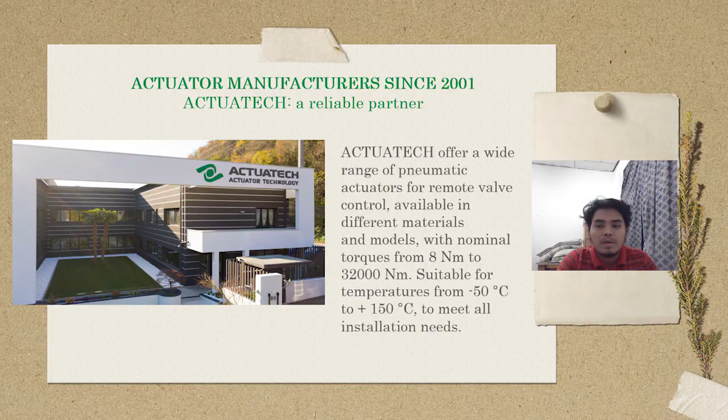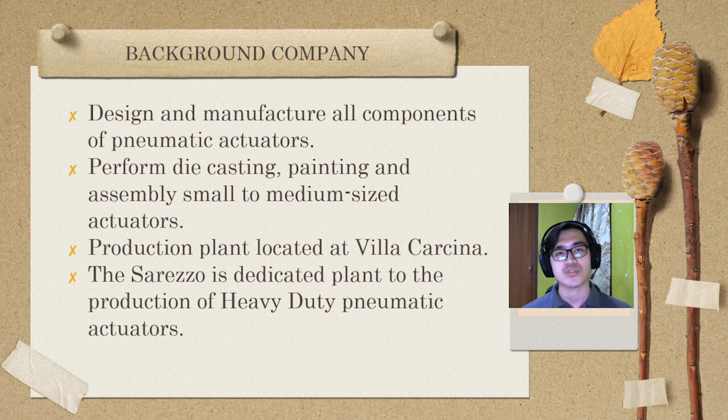Actuatech designs and manufactures all the components of our pneumatic actuators internally. There are two production plants. First is Villa Carcina, which carries out die casting, painting and assembly of small and medium sized actuators, while the other, the Sarezzo plant, is dedicated to the production of large pneumatic actuators, such as heavy duty actuators.

Meanwhile, the company also has its own vision, which is the right balance between man and the environment, improving quality of life and ensuring a better world for future generations.

Actuatech has its own mission, which is to provide a better world for the children and protect the environment that surrounds us, while concretely improving quality of life by making plants more secure and reliable.

During 2017, Actuatech built up a new headquarters and production site. They relocated the headquarters and production to Via San Lorenzo 70 at Villa Carcina, Brescia.

Next is for year 2020, new web identity was created. Actuatech overhauled its online image, which integrates institutional content with a complete product catalog, accessible also from mobile devices.

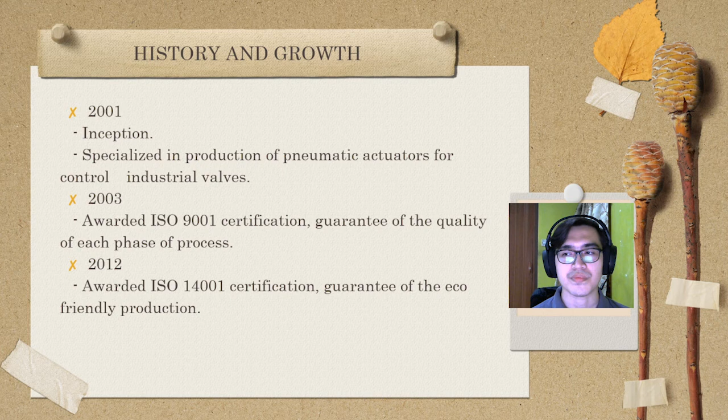Our company, Actuatech, mainly focuses on pneumatic actuators. The function of a pneumatic actuator is to enable forces produced from small pressure changes. Other than that, the power source also does not need to be stored in reserve for operation.

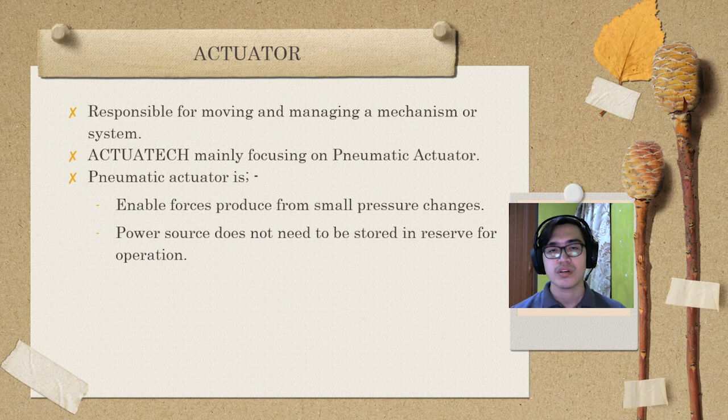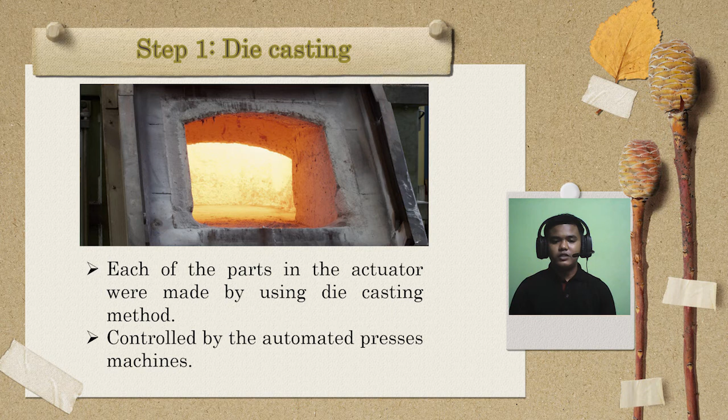Manufacturing process and technology employed. Step 1, die casting. Each of the parts in the actuator that were made from metal were made using the die casting method. This method was controlled by automated press machines.

Step 2, coating. Details of the actuator that require painting were controlled by a powder coating system. This system follows the regulatory standard accepted by the factory.

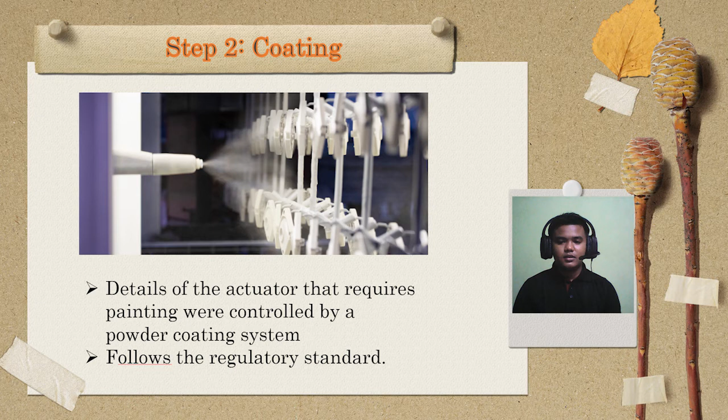Step 3, body machining. The internal machining of the body was done to minimize friction between parts and increase its accuracy and efficiency.

Step 4, piston machining. Automated control machining machines, controlled by experts, were used to machine the piston. This is to make sure it follows the standard needed for the actuator.

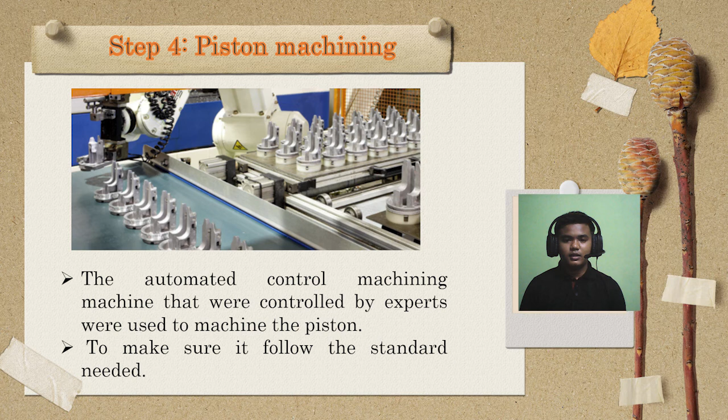Step 5, stem machining. The machining process of the actuator shaft was also controlled by a CNC milling machine, which is reliable for its accuracy. Step 6, molding plastic parts.

The plastic parts, such as O-rings in the actuator, were produced using injection molding machines. It undergoes strict inspection to ensure precision in the parts.

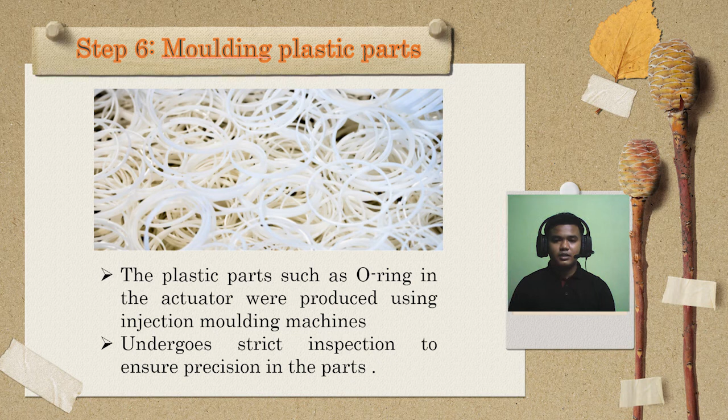Step 7, 3D measurement. To check the production quality, contact and optical machines were used to perform precise measurement on all the parts. This is to make sure that the parts can be assembled perfectly.

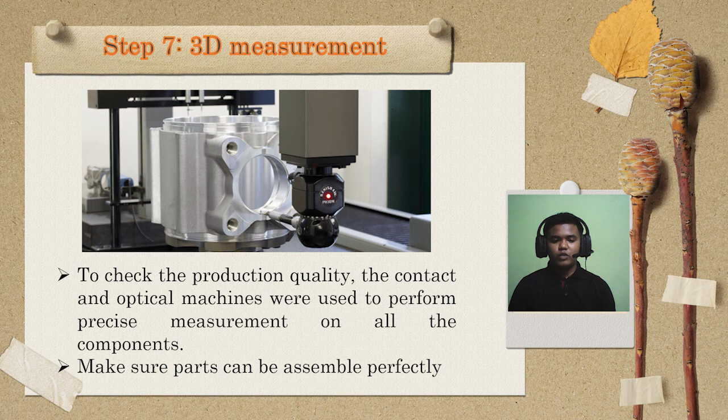Step 8, assembly process. Actuatech technicians follow the product at every step of the assembly process. This is to guarantee the reliability of the actuator produced.

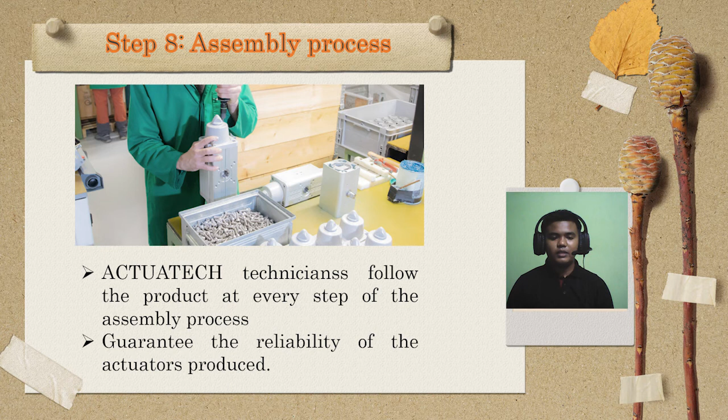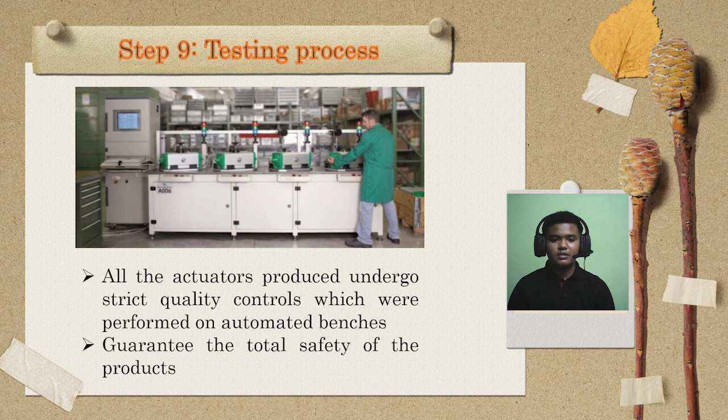Step 9, testing process. All the actuators produced undergo a very strict quality control which is performed on automated benches. This is done to guarantee the total safety of the products.

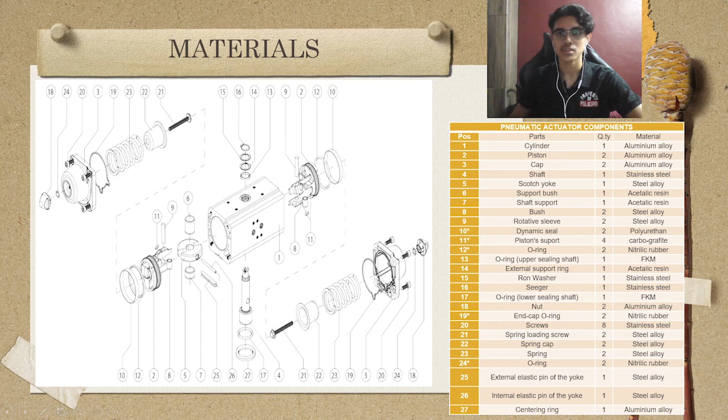For this slide, I'm going to talk about material and component in pneumatic actuator. There are 27 components in pneumatic actuator, and majority of the components are made of aluminum alloy, stainless steel and steel alloy. This diagram shows the exploded view of components in pneumatic actuator, and next to it is the bill of material.

For the second slide, I'm going to explain how does the pneumatic actuator work. Pneumatic actuator relies on some form of pressurized gas, most often compressed air, entering a chamber where the gas builds up pressure. When it has built up enough pressure in contrast to the outside atmospheric pressure, it results in a controlled kinetic movement of a device such as a piston or gear.

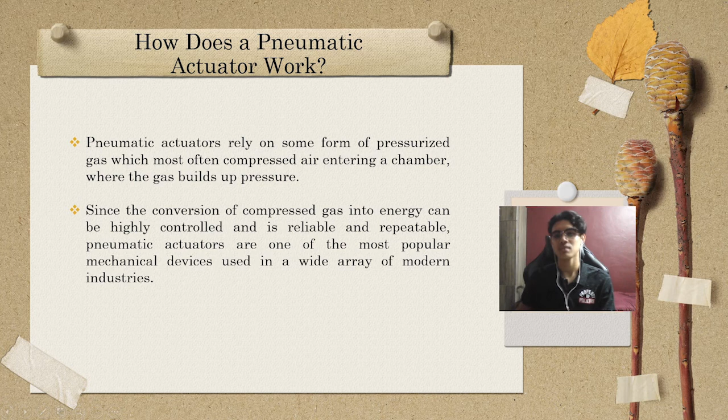This resulting movement can be directed in either a straight line or a circular motion. Since the conversion of compressed gas into energy can be highly controlled and is reliable and repeatable, pneumatic actuators are one of the most popular mechanical devices used in a wide array of modern industries.

Next, I want to talk about quality assurance. For Actuatech, guaranteeing quality to its customer does not just mean designing and manufacturing high performance and safe pneumatic actuators. It also means achieving this result through effective and efficient internal processes. The quality of Actuatech products and processes is demonstrated by specific certification.

The creation of a quality product implies the rigorous control of each product phase, from design to testing. The Actuatech design department, using sophisticated 3D CAD software, designs independently all the components of every single actuator that will be produced in the company factories.

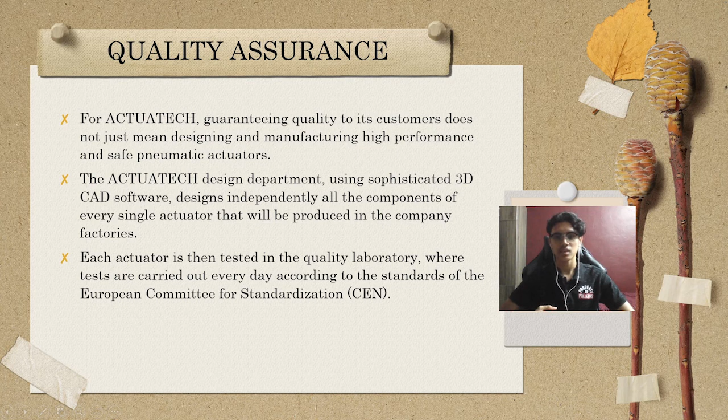Each actuator is then tested in the quality laboratory, where tests are carried out every day according to the standards of the European Committee for Standardization (CEN). This is how Actuatech successfully produces pneumatic actuators capable of guaranteeing high performance and reliability. They can be used safely in many fields, from environments with potentially explosive atmosphere to the maritime sectors.

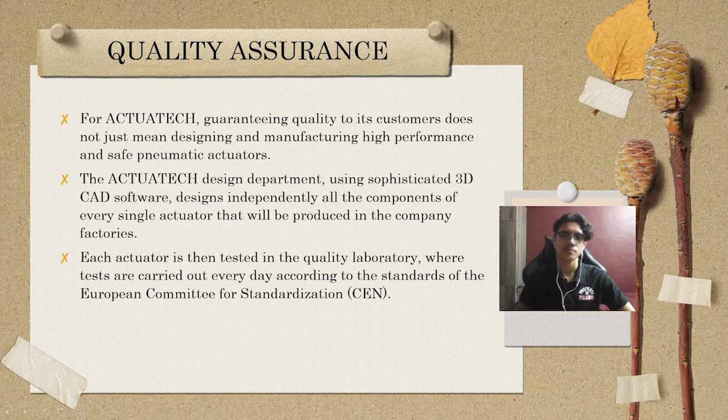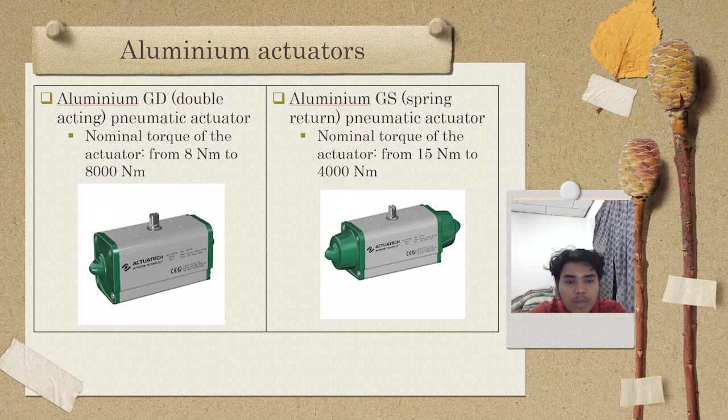There are 7 categories of products produced by company Actuatech. First category, aluminium actuator: aluminium GD double acting pneumatic actuator. Second, aluminium GS spring return pneumatic actuator. Next category, actuator with integrated handwheel: GDV double acting pneumatic actuator with integrated manual control. Second, GSV spring return pneumatic actuator with integrated manual control.

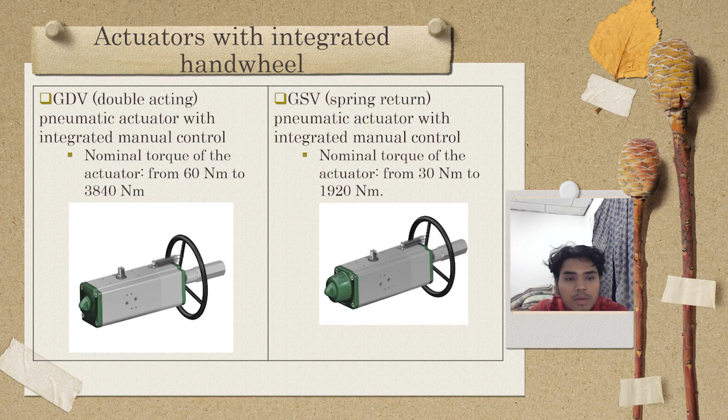Third category, inox precision casting CF8M actuator. Product GD double acting pneumatic actuator CF8M microcast stainless steel. Second product, GS spring pneumatic actuator CF8M microcast stainless steel.

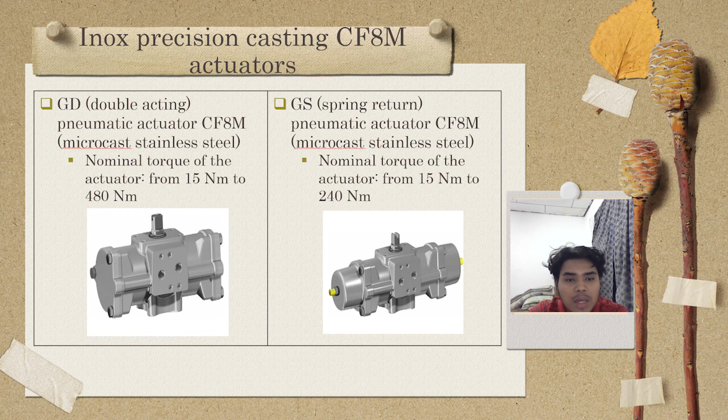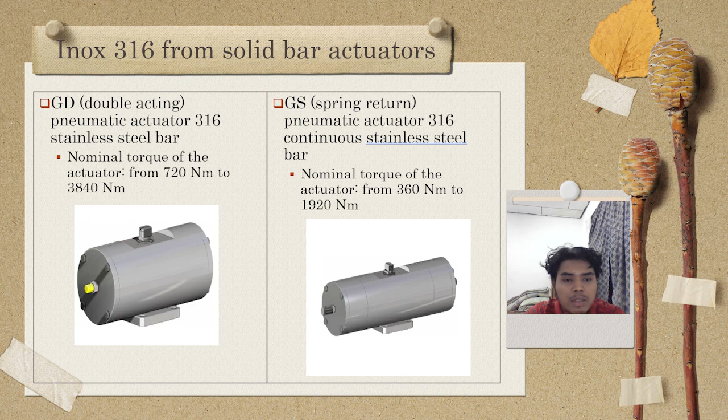Next, inox 316 from solid bar actuator: GD double acting pneumatic actuator 316 stainless steel bar. Second, GS spring pneumatic actuator 316 continuous stainless steel bar. Next category, carbon steel A105 actuator: GD double acting pneumatic actuator A105 carbon steel. Next, product GS spring pneumatic actuator A105 carbon steel.

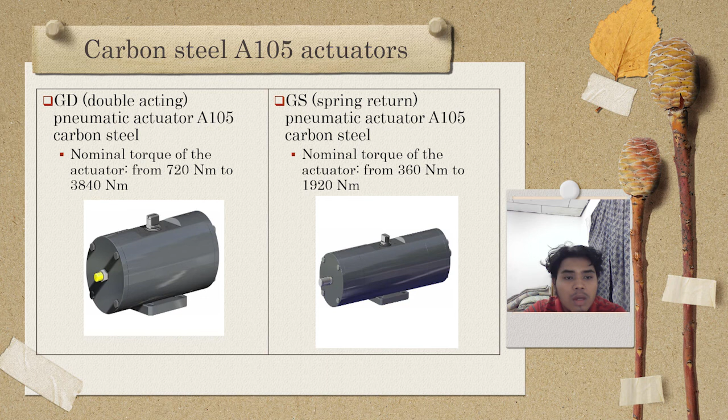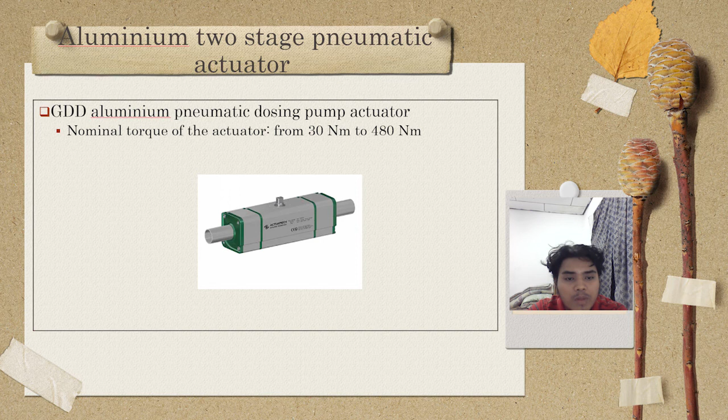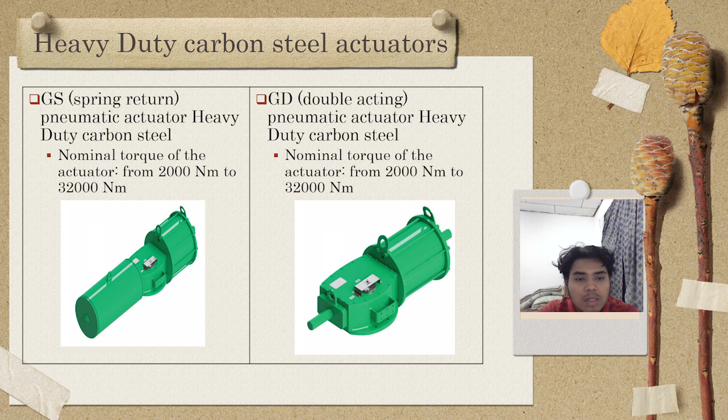Next category, aluminium 2-stage pneumatic actuator. Product GDD aluminium pneumatic dosing pump actuator. Last category, heavy duty carbon steel actuator: GS spring return pneumatic actuator heavy duty carbon steel. Next, product GD double acting pneumatic actuator heavy duty carbon steel.

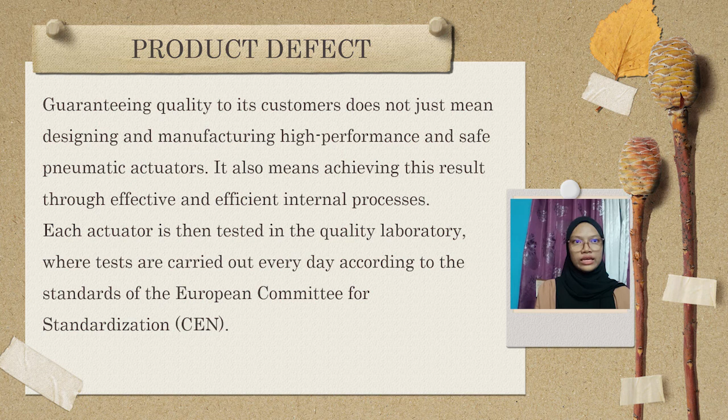I'm going to present about the problem faced by the company, which is product defect. The company guaranteeing quality to its customer does not just mean designing and manufacturing high performance and safe pneumatic actuators. It also means achieving this result through effective and efficient internal process. Each actuator is then tested in the quality laboratory, where tests are carried out every day according to the standards of the European Committee for Standardization.

First of all, the actuators fail to fully extend or fully retract. This is because the valve and the actuators are not in the same orientation. During the assembly process, the valve and the actuators did not assemble properly, causing this defect. Another cause is that the power gas pressure is too low.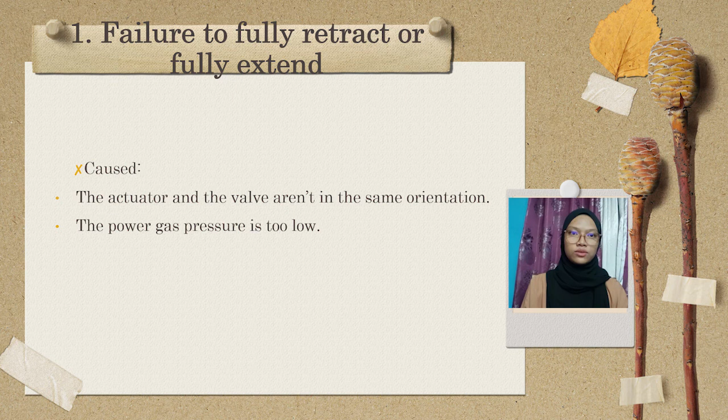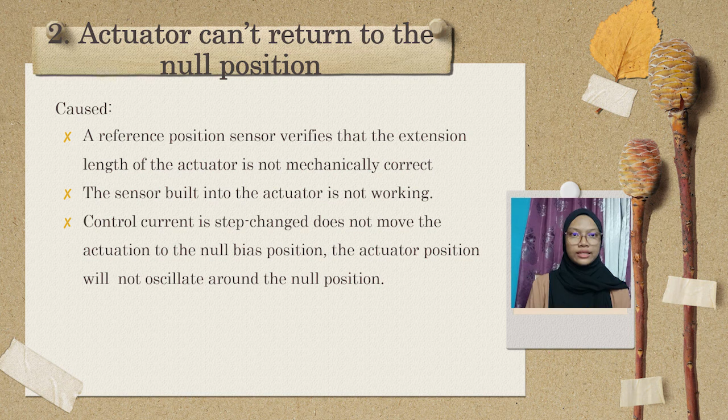Next, the actuator cannot return to the null position. This is because the reference position sensor verifies that the extension length of the actuator is not mechanically correct. So the sensor built into the actuator is not working.

Another defect is thread screw does not smooth. Thread screw is a structure responsible for converting rotational motion into linear motion as screw shaft and nuts slide each other. During machining, this defect happens because the machine works with low cutting speed and poor shearing action. Machining tools also not too sharp, contributing to the unsmooth screw thread.

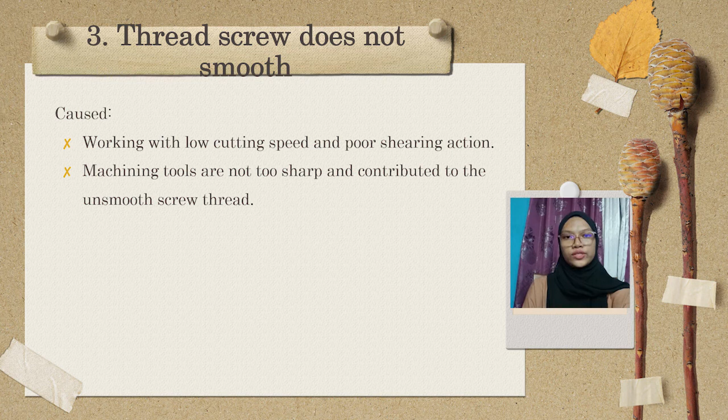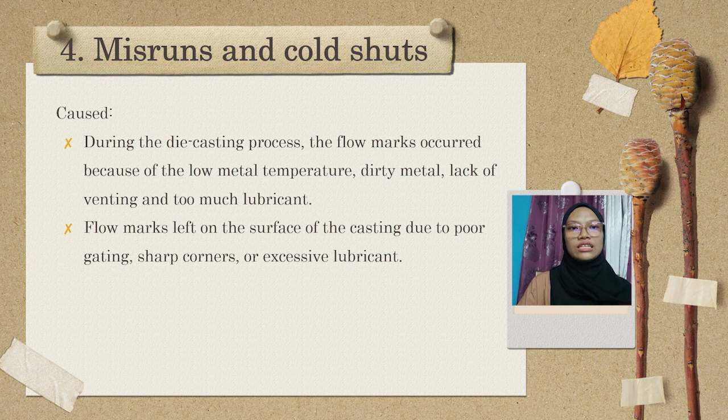Misruns and cold shuts are also defects of the actuator. During the die casting process, flow marks happen because of low metal temperature, dirty metal, lack of venting, and too much lubricant. Flow marks are left on the surface of the casting due to poor gating, sharp corners, or excessive lubricant. Last but not least is cracks.

Cracks are a type of surface defect. There is a line or crack at the casting surface because cracking usually happens at temperature at or near normal ambient. It is caused by higher stress applied on the metal.

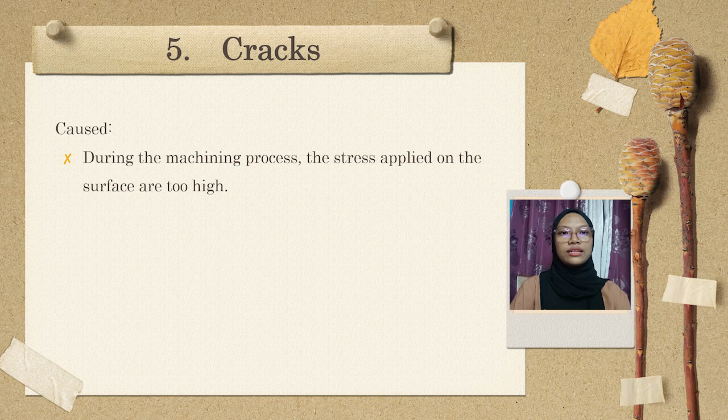Suggestion of suitable manufacturing process: instead of using injection molding for the plastic parts, another suggestion is extrusion molding because it is lower cost. It uses materials that can repeatedly undergo melting and hardening, but the leftover materials, normally discarded as waste in other processes, can be reused again.

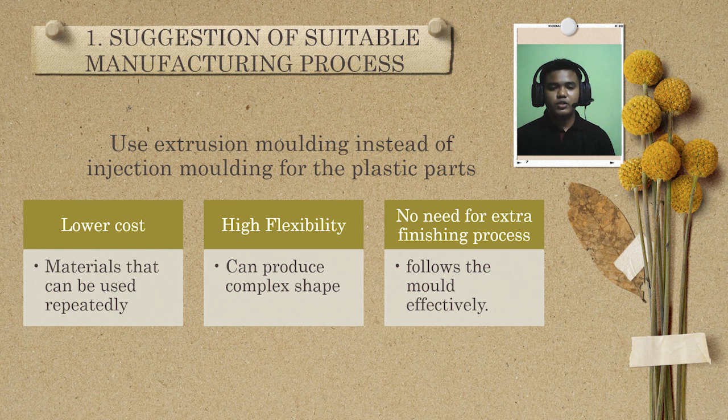Plastic extrusion machines can be operated continuously, thus reducing the chances of inventory shortage and allowing for 24 hours a day manufacturing. High flexibility: it provides considerable flexibility in manufacturing products with consistent cross-section. It can also produce complex shapes, with no need for extra finishing process as the end products follow the mold effectively.

Next suggestion for suitable manufacturing process is to use capillary drilling instead of shape tube electronic machining (STEM). Capillary drilling (CD) is an acid electrolytic drilling technique for drilling small holes in hard corrosion-resistant metals. STEM is an acid electrolytic drilling technique for making long deep precision holes in hard corrosion-resistant metals. Capillary drilling does not require any insulation,

while STEM requires insulation at the tools, which is a titanium tube. The cost in the capillary drilling process is lower than shape tube electronic machining. The hole diameter as small as 0.2 to 2 mm can be achieved by capillary drilling, while STEM can achieve 0.5 to 5 mm diameter. This shows that capillary drilling is more suitable for this process than shape tube electronic machining.

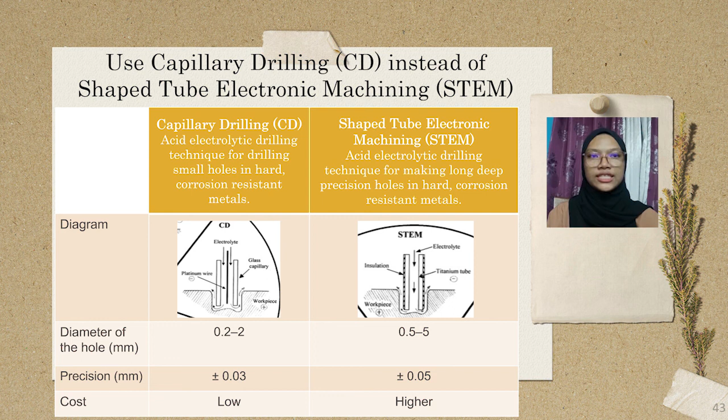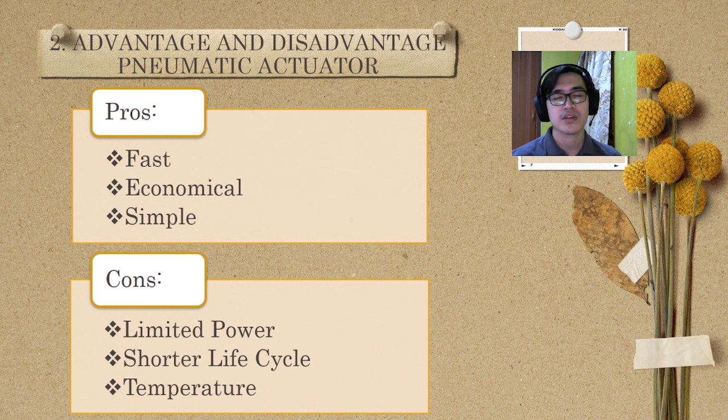Next discussion: what products can be produced using this method. First, medical devices such as gearbox for hospital beds and surgical tools. Second, recreational vehicles (RV), and lastly, firearms such as trigger guard, trigger, and safety.

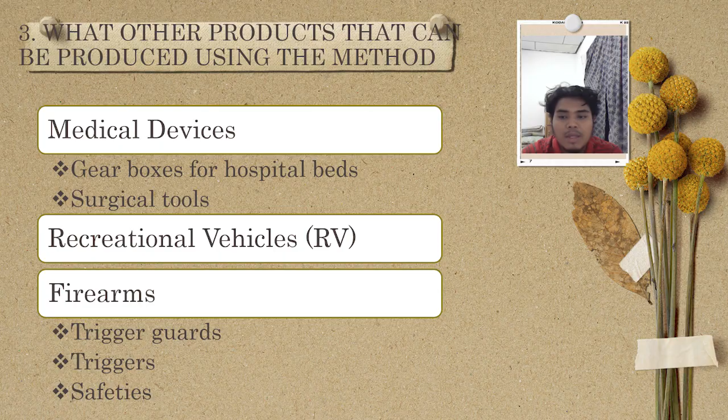Next, I'm going to discuss the application of actuators. In industries, actuators are ideal for use in industrial plants such as steam plants, glass production plants, and technical gas generators. For automotive, actuators are designed and manufactured for firefighting vehicles, component molding, and washing. Next, for food and beverage, actuators are used in the treatment plants of oil mills and chocolate factories.

Besides that, for oil and gas, actuators are used in applications of petrochemical, refinery, and lubricant sectors. Lastly, for ink and paint, actuators are suitable for use in ink and paint production plants.

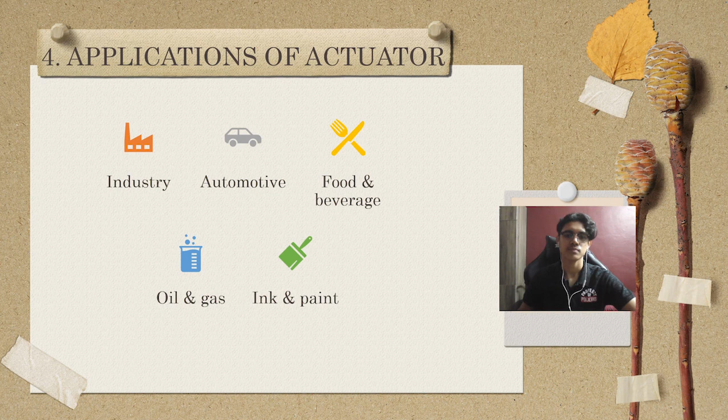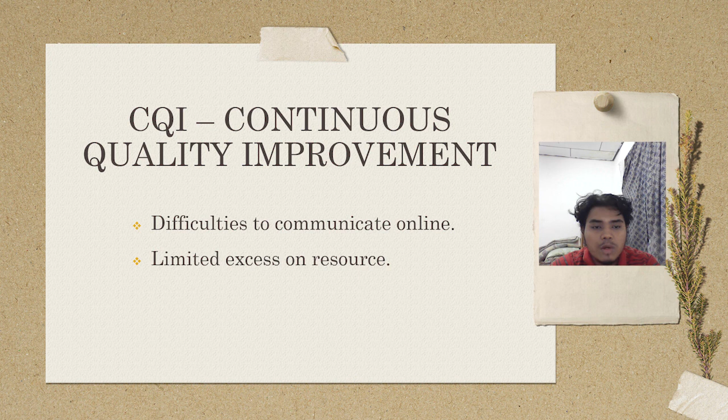For the CQI part, continuous quality improvement for this course, we found two improvements. First, difficulty to communicate online and limited access on resource.